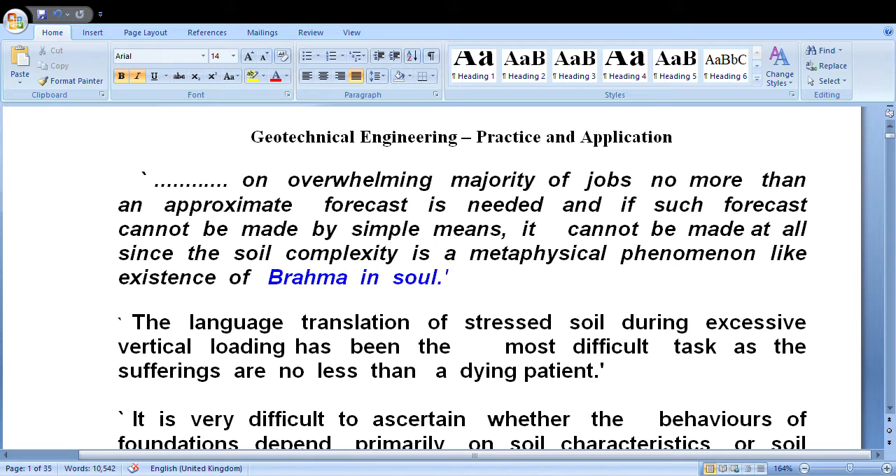Another comment was made by Scott and Bowles. It is very difficult to ascertain whether the behavior of a foundation depends primarily on soil characteristics or soil behaves at the will of foundations, like a seed plant phenomenon. Yet the behavior of underlying soil has a substantial role in construction management.

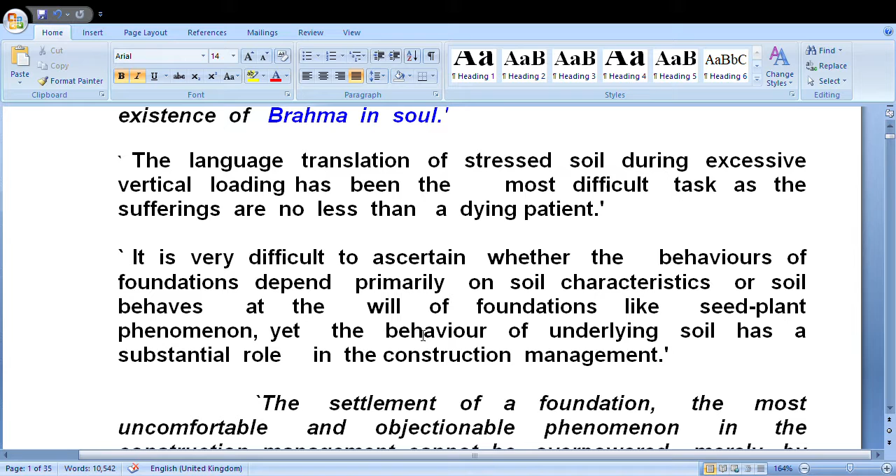Scott made specific comments on settlement. The settlement of a foundation, the most uncomfortable and objectionable phenomenon in construction management, cannot be overpowered merely by theoretical estimate alone, as the mineral skeleton breakdown may not always be proportional to time elapsed.

Another great comment was made by Karl Terzaghi, the father of soil mechanics. Soil mechanics is neither a theoretical science nor a mathematical science, as it is a practical science based on intuition only.

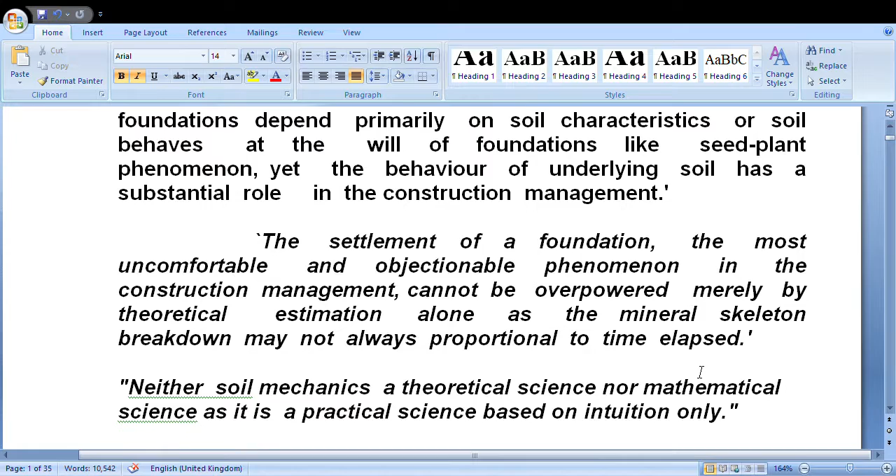Another specific comment is from my reverend guru, Dr. A.N. Chaudhary, who was a student of Professor Winterkorn at Princeton University. In his project report, he said: till now we are ignorant or incapable of actual estimation of the soil foundation interaction system. For this reason of lack of compatible knowledge, we more commonly prefer to adopt a fool-factor in the name of safety, even with no hesitation in putting a huge quantum of concrete underground, while misleading information and immature interpretation of principles are the root of all major structural damages.

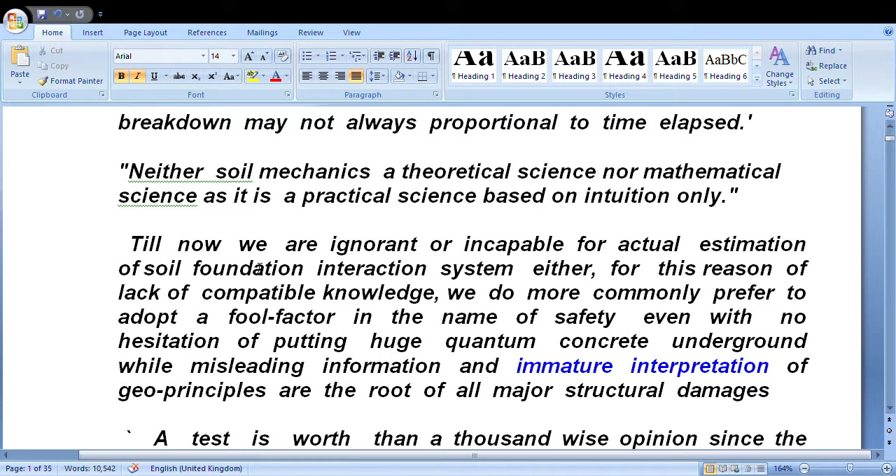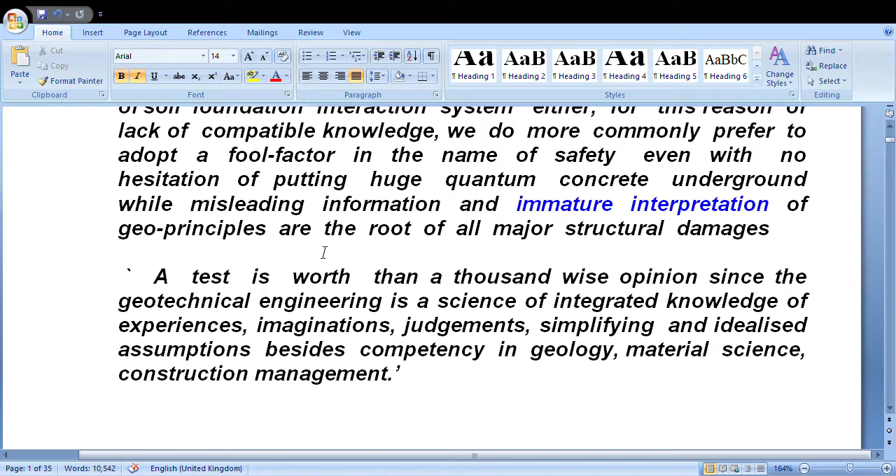Dr. Karl Terzaghi once also commented, a test is worth a thousand wise opinions, since geotechnical engineering is a science of integrated knowledge of experience, imagination, judgment, simplifying and idealized assumptions, besides competency in geology, material science, and construction management. In fact, I have presented these comments here to you so that you can understand what geotechnical engineering is.

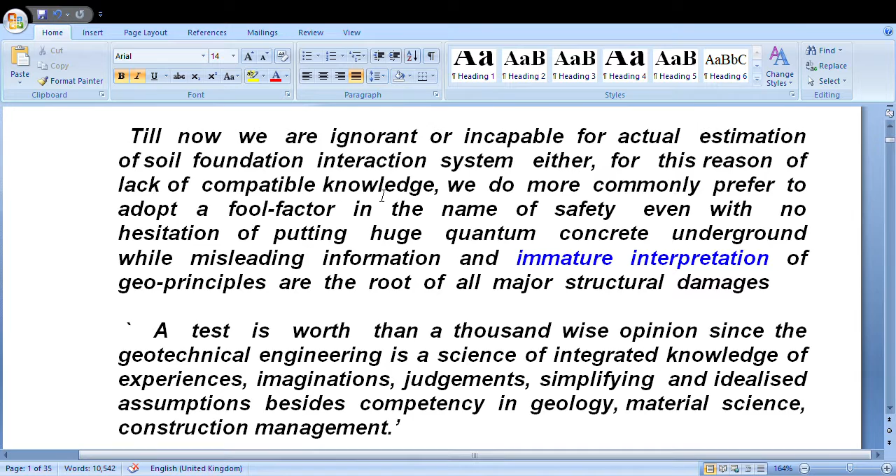In earlier days, geotechnical engineering was known as soil mechanics and foundation engineering, the science of engineering soil and its behavior in foundations. Although the youngest science, it is neither a mathematical science nor a theoretical science; it is a science of reasoning and intuitional judgment. So soil mechanics is the art of civil engineering. Every structure except flying or floating rests on soil. The relation between soil and foundation is Geotechnique.

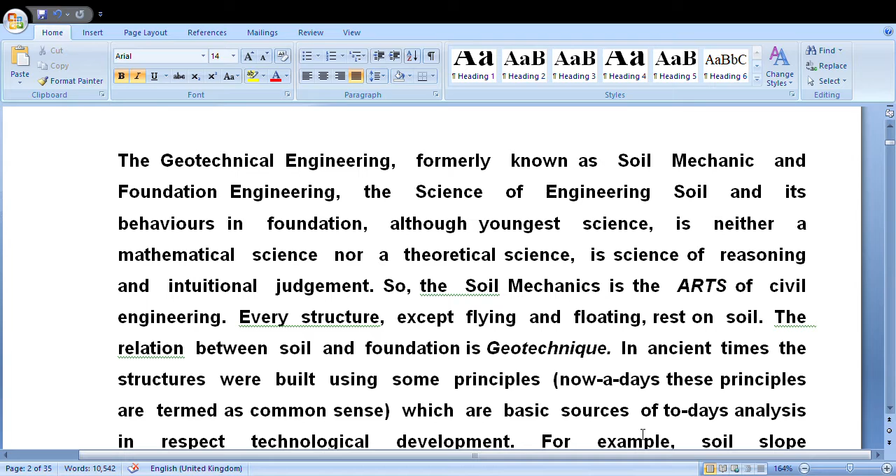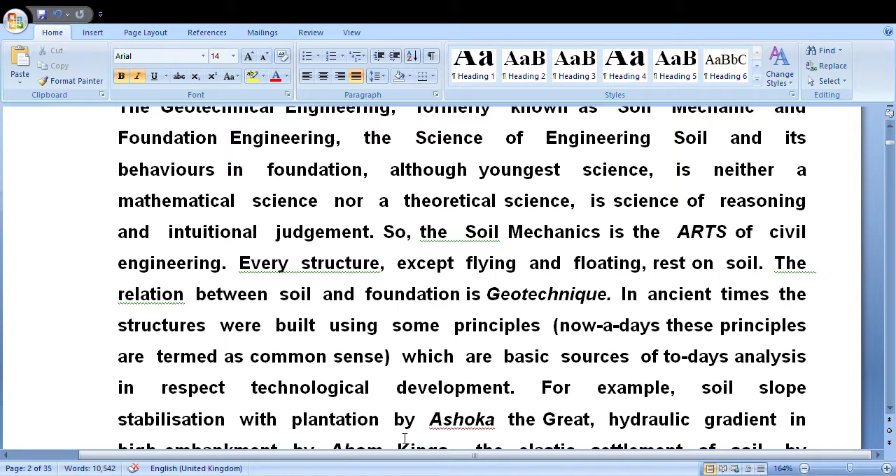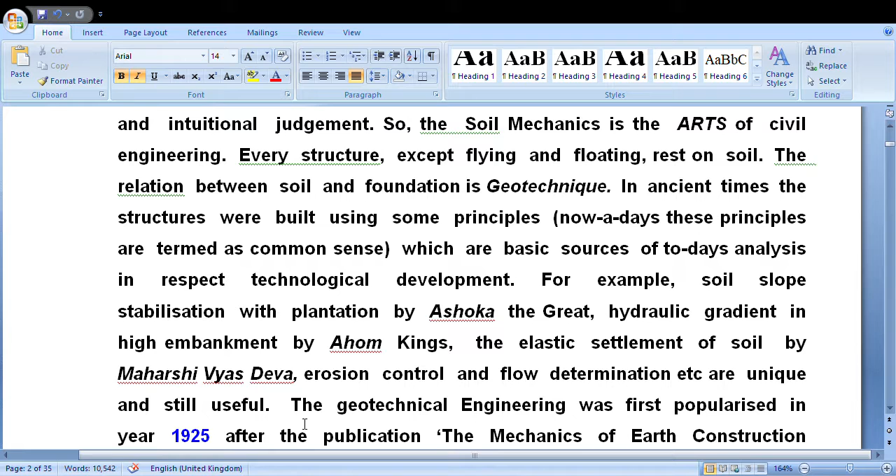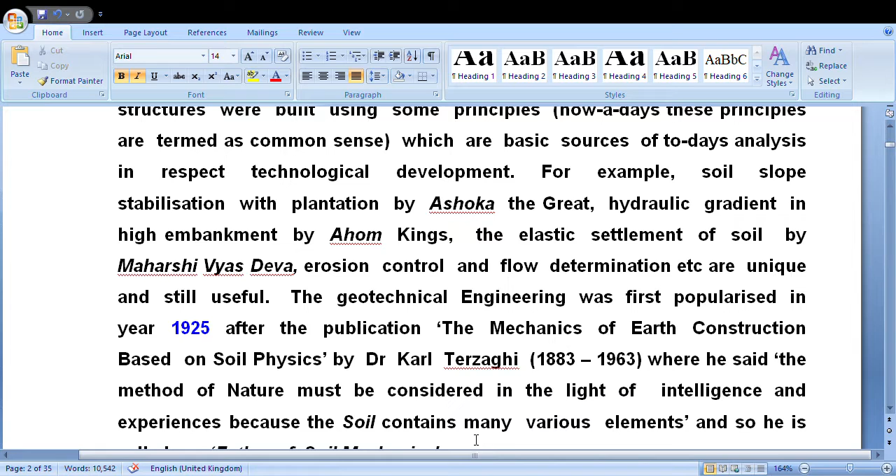Geotechnical engineering was first published and popularized in 1925 after publication of the Mechanics of Earth Construction based on soil physics by Dr. Karl von Terzaghi, where he said the method of nature must be considered in the light of intelligence and experience, because soil contains many various elements, and so he is called the father of soil mechanics.

Geotechnical engineering covers the science of soil mechanics, soil engineering, rock mechanics, engineering geology, foundation engineering, hydrology, everything. It is an essential and integrated part of civil engineering. Modern geotechnical engineering even covers geo-environmental engineering, geoecology and geolandscaping too.

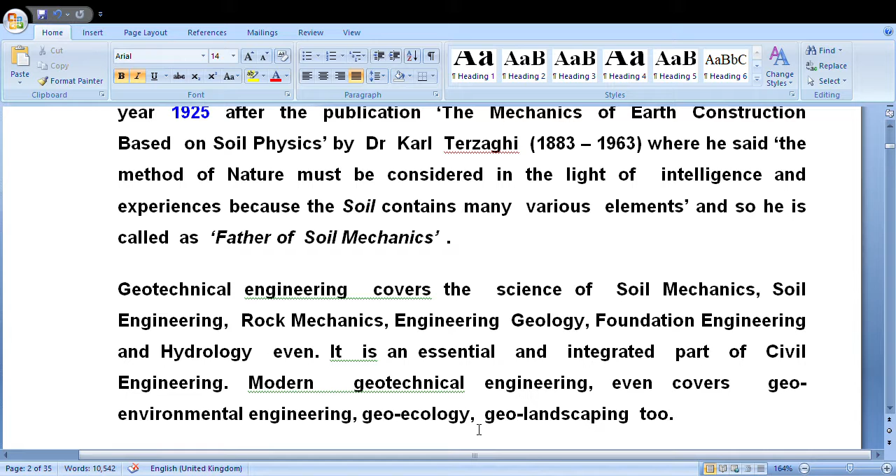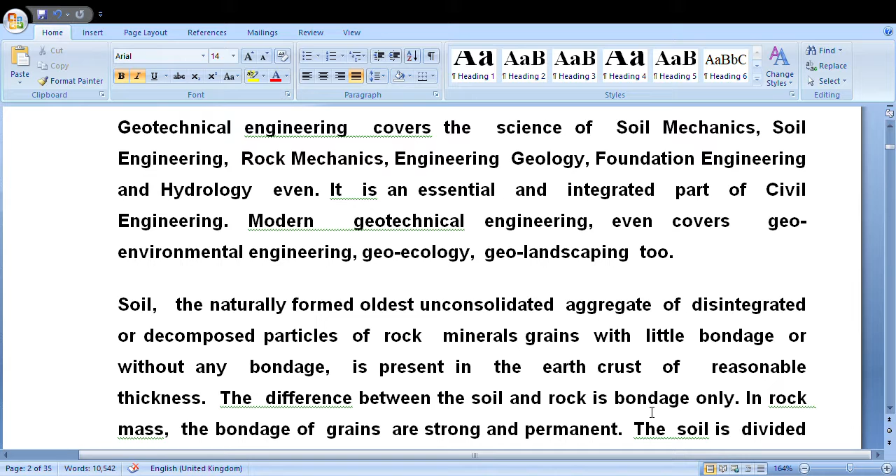Soil is naturally formed of unconsolidated aggregates of disintegrated or decomposed particles of rock mineral grains, with little bondage or without any bondage, and available at the earth's crust for reasonable thickness. The difference between soil and rock is bondage only. All the mineral constituents remain the same. In rock mass, the bondage of grains is strong and permanent. Soil has no bondage of grains at all, or very poor.

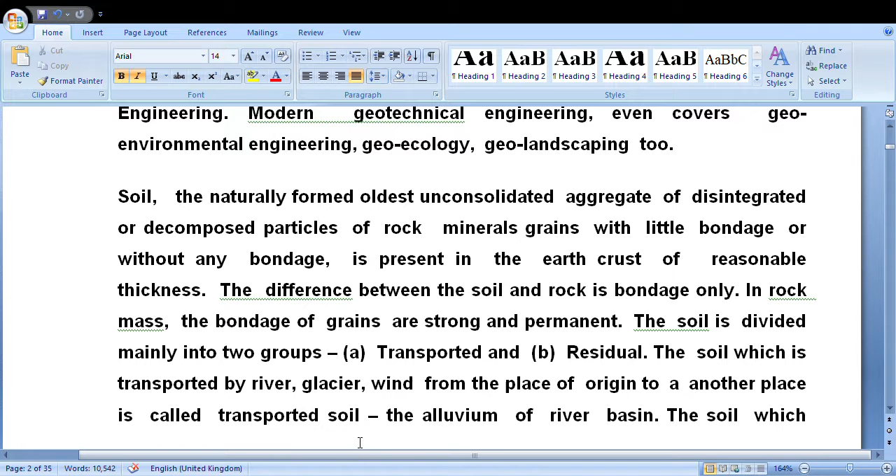Soils are divided mainly into two groups, residual and transported. Soil which is transported by river, glacier, or wind from the place of origin to another place is called transported, like alluvium of a river basin. Soil which remains at the same place of origin is residual. Hill soil other than structural hills.

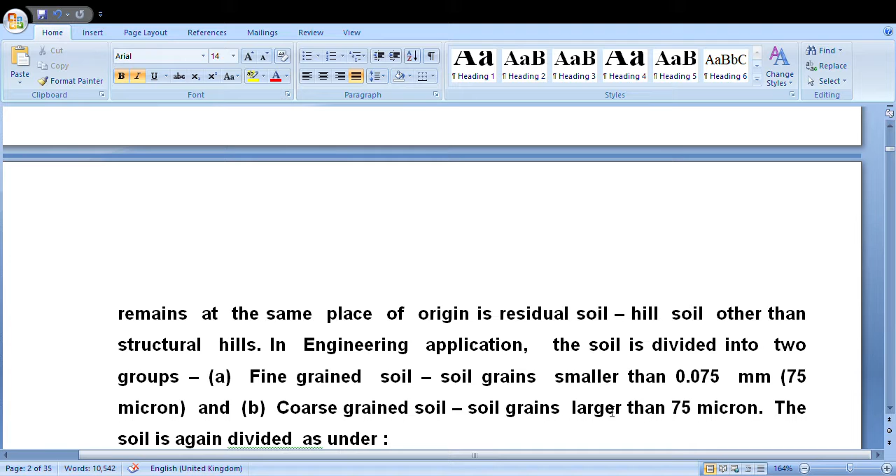In engineering application, soil is divided into two groups, fine grained soil and coarse grained soil. Fine grained soils are finer than 75 micron, and coarse grained soils are above 75 micron. Here, less than 2 micron is the clay fraction, 2 to 75 micron is silt, and from 4.75 mm it is gravel,

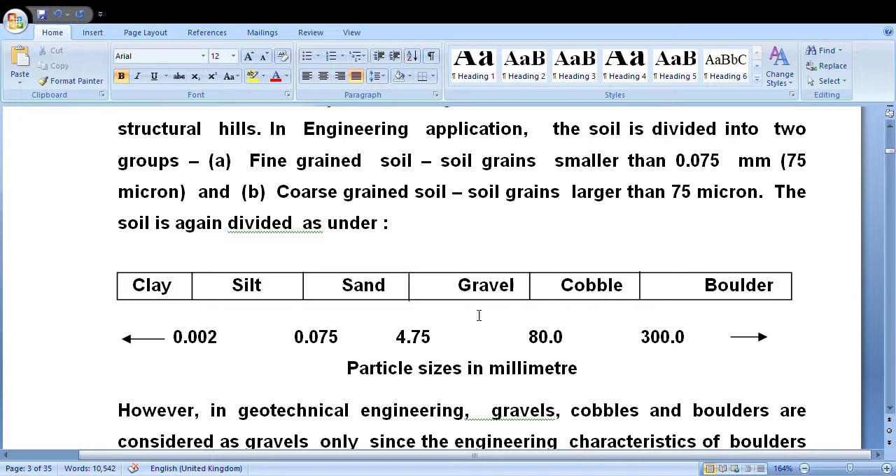up to 80 mm. Some say it is 70 mm, and some say 75 mm. However, up to 70 to 80 mm it is gravel, up to 300 mm it is cobble, and above 300 mm it is called boulder. But in geotechnical engineering, a particularly important factor is there. Gravel, cobbles, and boulders are all considered as gravel, because the engineering properties of cobbles and boulders are the same as those of gravel. So gravel, cobbles, and boulders are considered as gravel only.

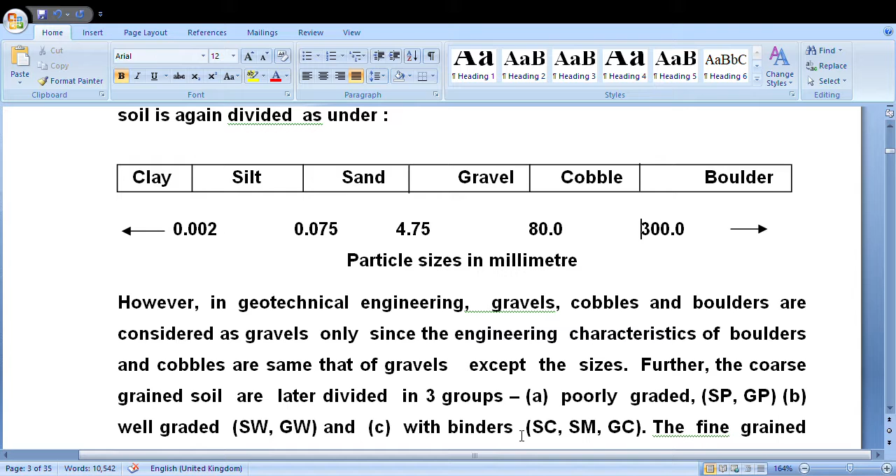Later, these types of soils, coarse grain and fine grain, whatever it may be, are considered in three groups: poorly graded, well graded, and with a little binder, that is fines. These are poorly graded SP GP, well graded SW GW, and with little binders, that is SC, SM, GC.

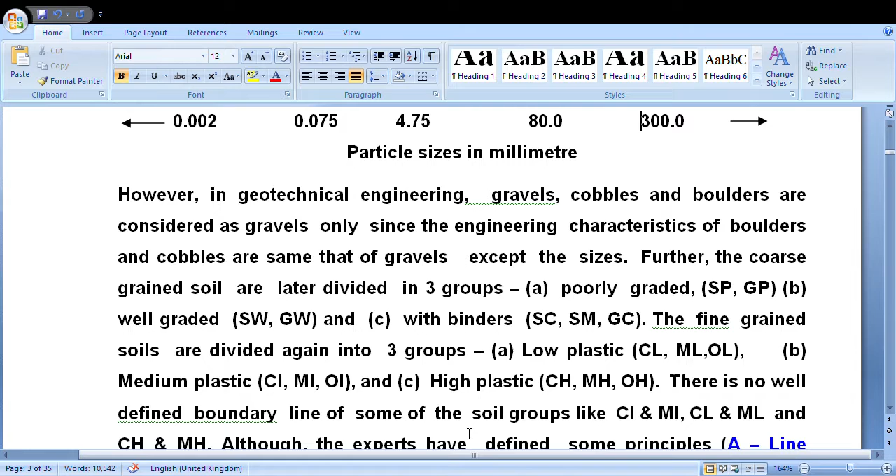In addition, fine grain soil is also classified into three different groups: low plastic such as CL, ML, OL; medium plastic CI, MI, OI; high plastic CH, MH, OH. There is no well-defined boundary line between some of these soils, like CI and MI, CL and ML, and CH and MH, although experts have suggested some principles, called the A-line curve, depending upon the plastic limit and liquid limit.

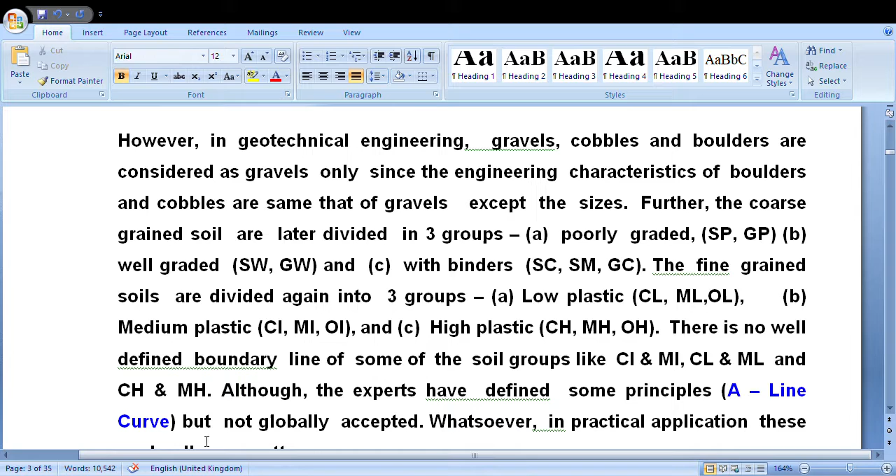But these A-line principles are not globally accepted. In practical applications, there is hardly any difference.

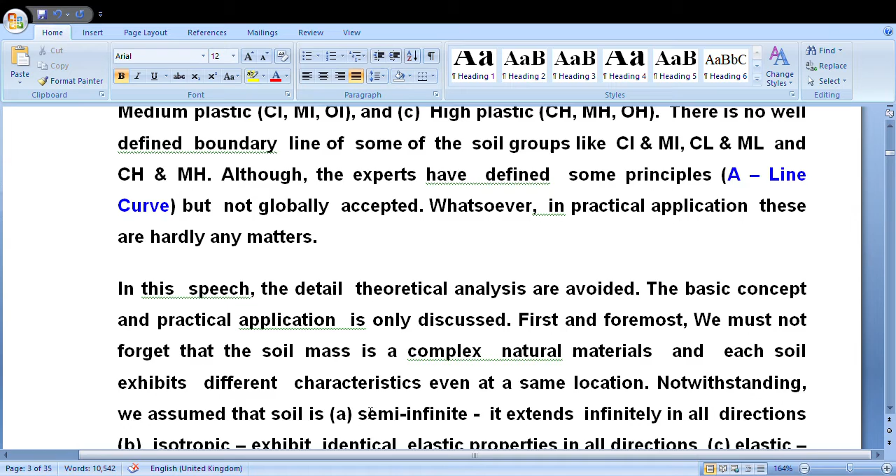In this speech, I am trying to avoid more details about theoretical analysis. Basic concept and practical application is discussed here, so that it will be primarily informative to young engineers, especially young practitioner engineers. We must not forget that soil mass is a complex natural material, and each soil exhibits different characteristics at the same location.

Notwithstanding, we assume that the soil is semi-infinite, soil is isotropic, soil is elastic, soil is homogeneous, soil is weightless, and it has no past history.

At the same time, I would like to mention one thing: soil has different meanings too. For an agriculturist, soil is the surface material which supports vegetation and plantation. For a construction engineer, soil is a construction material for construction of highways, roads, pavements, and these things. And coarse grain soil is used as a construction material for other purposes also, like concrete structures, runways, roadways, and all this.

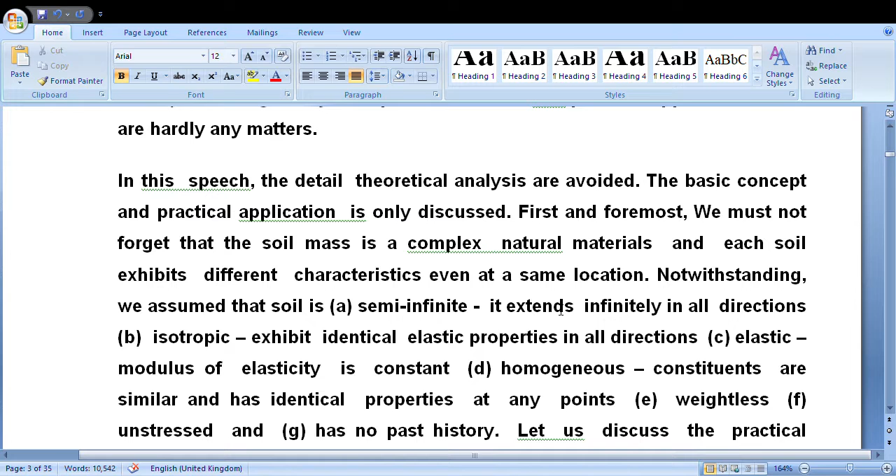For geotechnical engineers, soil is a complex substance of the earth's crust. Whether it is complex or not, for us we consider it complex since soil does not behave according to our own will, to our desires, to fulfill our desires. Soil never behaves as per our requirement.

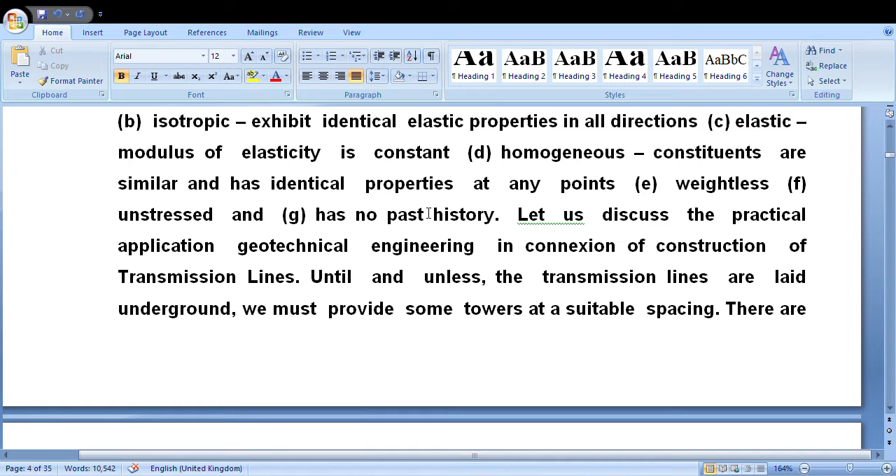Normally, we shall discuss the application of the soil parameters. It is since all types of structures rest on soil. That may be a shallow foundation on normal and standard average soil, or a deep foundation where shallow foundations could not be provided, such as at a riverbed, with very soft soil up to a reasonably high extent.

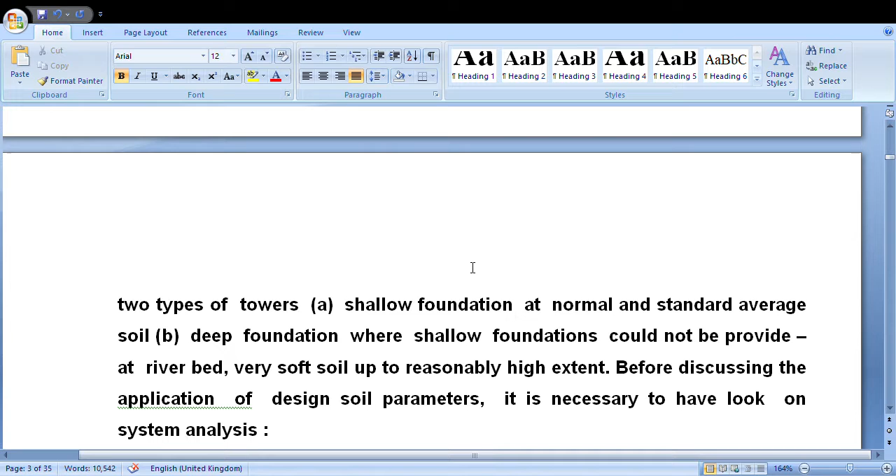So before discussing the main application, we must know how to derive our design parameters. For construction of a shallow foundation or deep foundation, I have already discussed the difference: when foundation depth by width, Df by B, is greater than 1, it is deep foundation. When it is equal to 1 or less than 1, it is shallow foundation.

For deep foundation or shallow foundation, we require SBC. In the case of piles, we require pile load capacity based on the same parameters. For that purpose, we require our SBC. Then, for the required parameters, we can estimate it from laboratory tests. For laboratory tests, we should go for field tests—these are boring and observation.

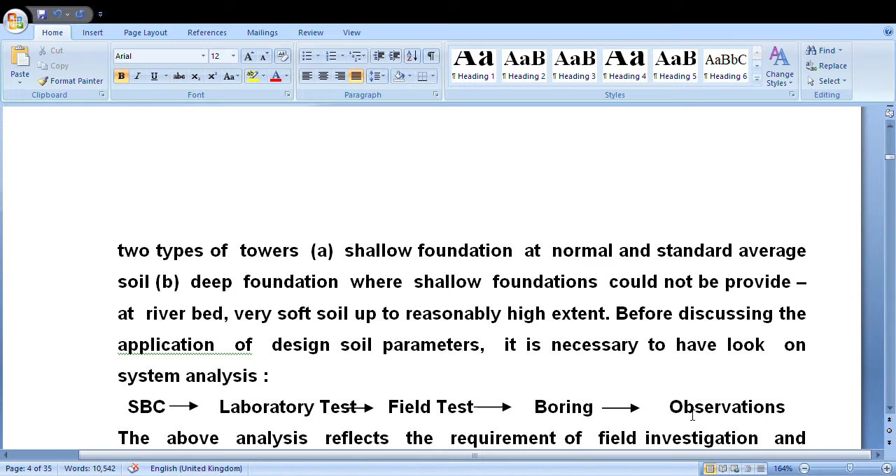The above analysis reflects the requirement of field investigation and observation, and laboratory test results, for designing the foundation base of any tower foundation, building foundation, or well foundation—whatever it may be, for any type of foundation.

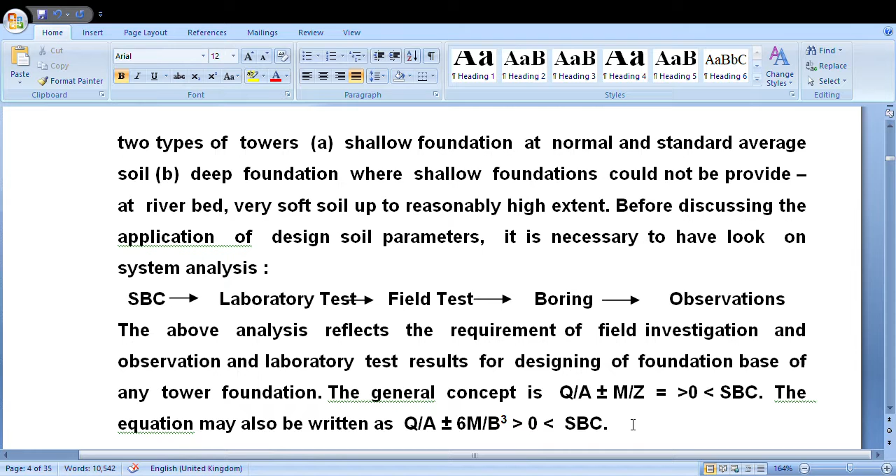SBC, the safe bearing capacity, is the maximum load bearing capacity with a suitable safety factor, without any excessive settlement.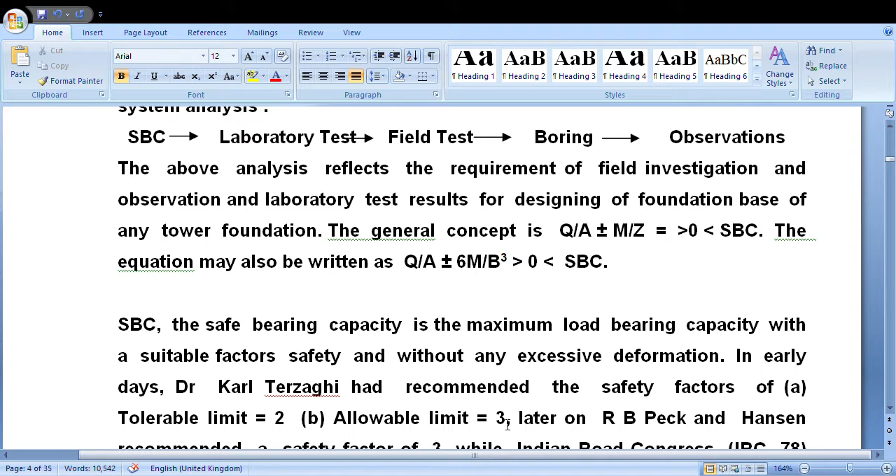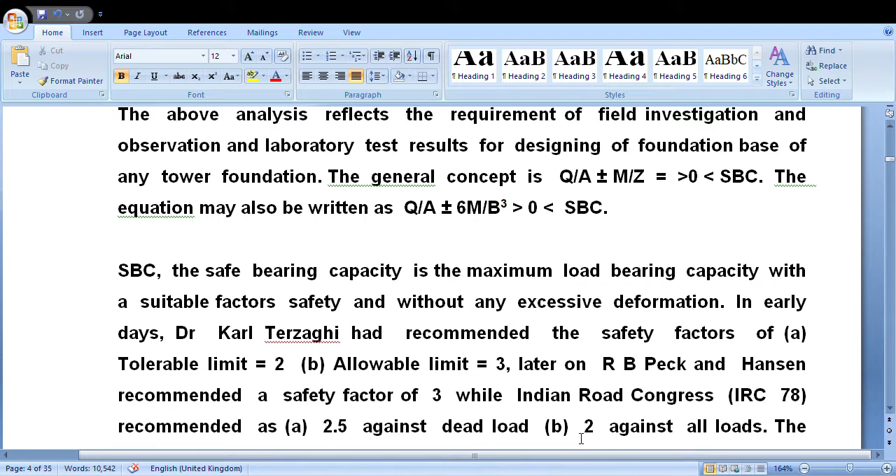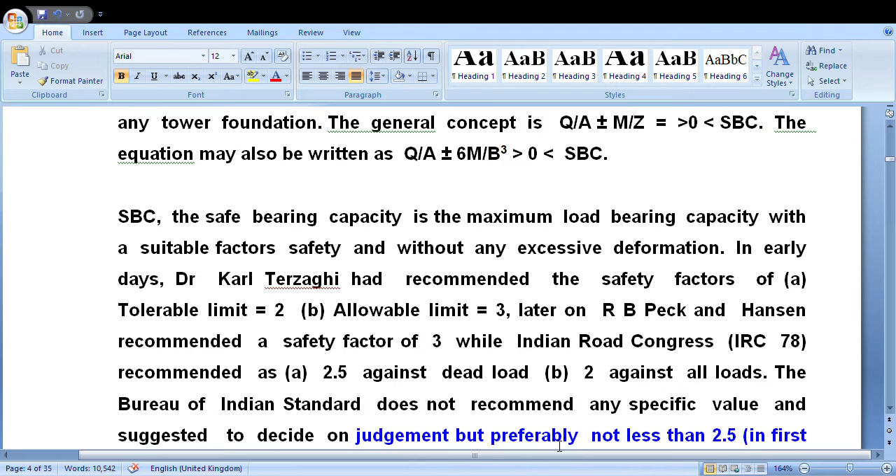In early days, Dr. Karl von Terzaghi had recommended a safety factor of tolerable limit as 2, allowable limit as 3. Later, Peck, Hansen, and Thornburn also recommended a safety factor of 3, while the Indian Road Congress recommended 2.5 against dead load and 2 against combination of all loads. The Bureau of Indian Standards does not recommend any specific value and suggests deciding on judgment, but preferably not less than 2.5, in its first publication in 1971, and the second publication in 1981 and 2000.

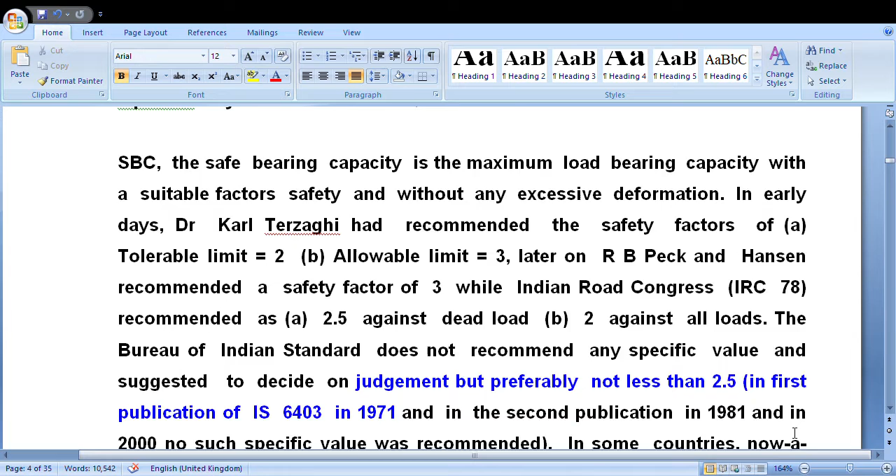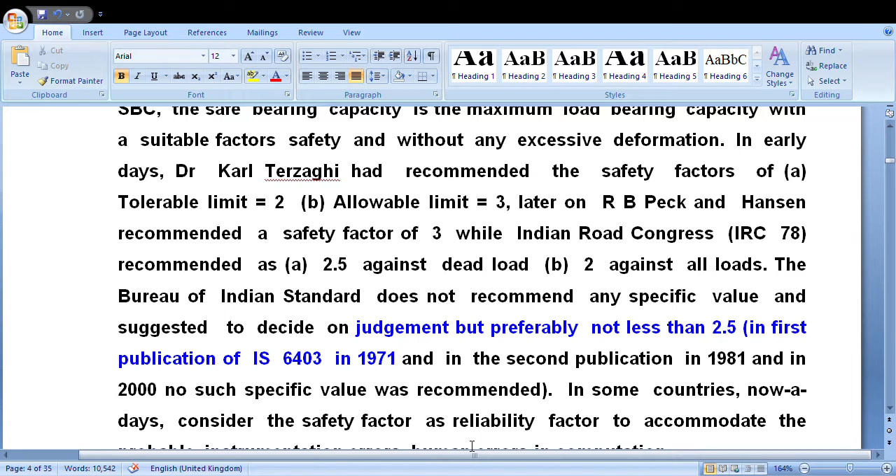No such specific value was recommended. In some countries nowadays, the safety factor is considered a reliability factor to accommodate probable instrumentation errors and human error in computation. In earlier days, in the 1960s, it was called the Fool's Factor, not safety factor. That means if there are big mistakes in collection of samples, in laboratory tests, and immature computation, then the safety factor should be taken as more. And if chances of mistakes are very less or negligible, then the safety factor may be 2.

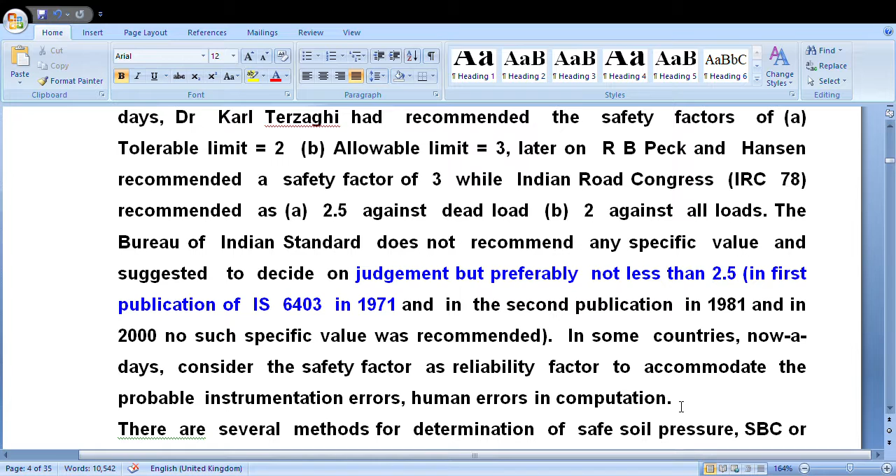There are several methods of determination of SBC, that is QA.

Out of these methods, the more popular ones are the QU and C-phi method, plate load test, SPT values, and stress-strain relationship.

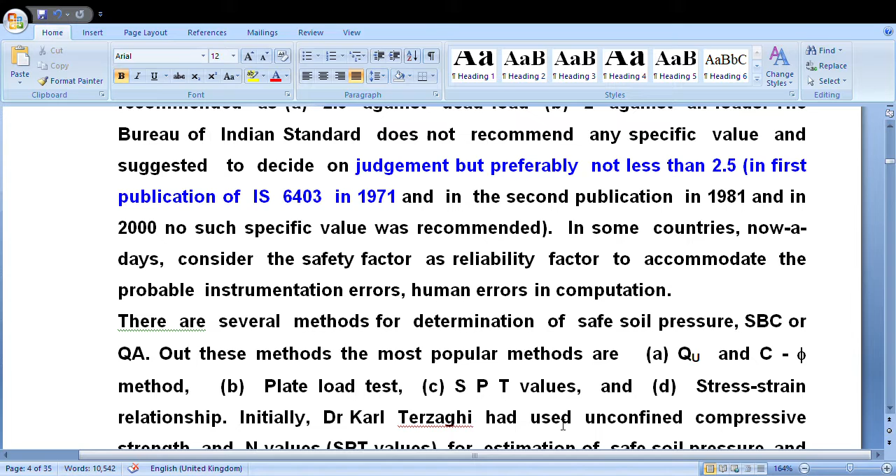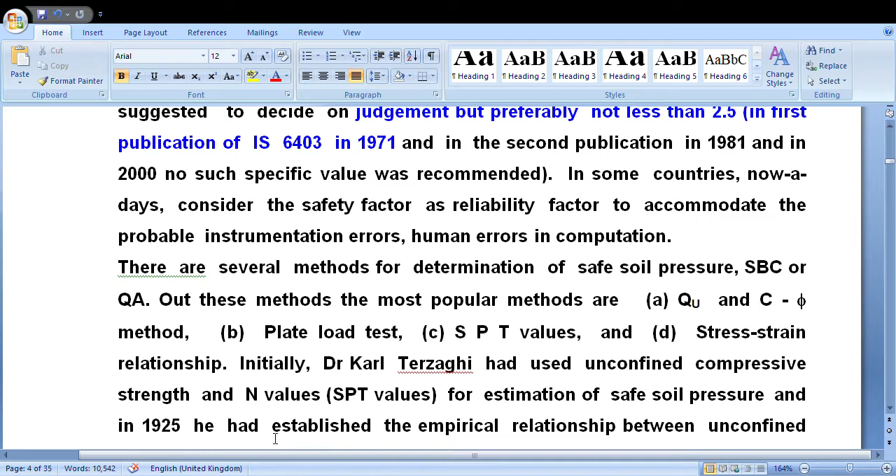Initially, Dr. Karl Terzaghi used unconfined compressive strength and N values for estimation of safe soil pressure, and in 1925 he established the empirical relationship between unconfined compression and confined shear test.

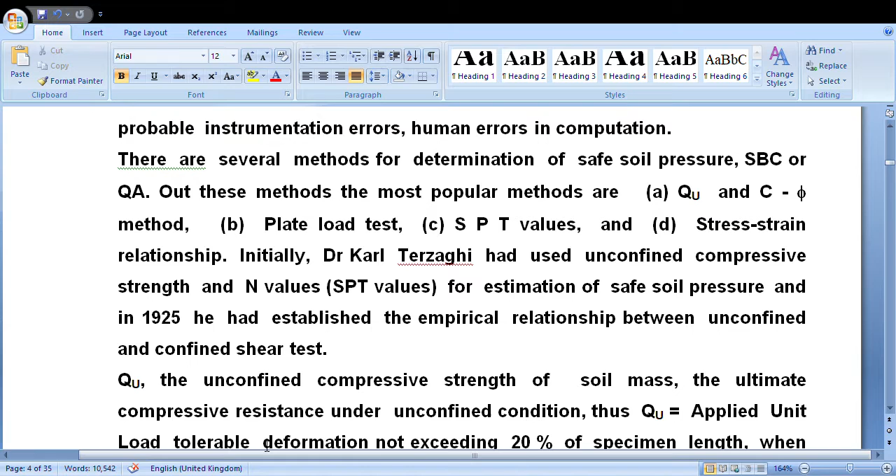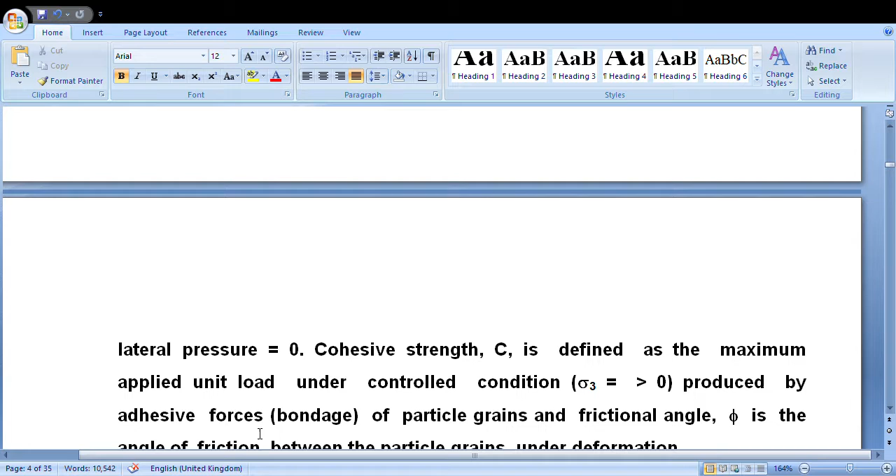The unconfined compressive strength of soil mass is the ultimate compressive resistance under unconfined condition. Q equals applied unit load at tolerable deformation not exceeding 20% of specimen length, when lateral pressure is zero, and cohesion C is defined as the maximum applied unit load under this condition, sigma 3 equal to 0, produced by adhesive force of particles and grains. Frictional angle is the angle of friction between the particles and grains under deformation.

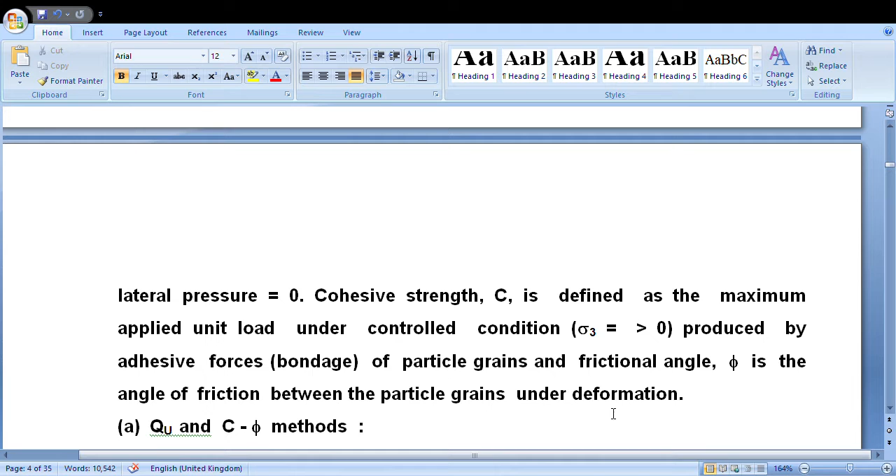From these relationships there are two methods: the QU and C-phi method. In the QU method, C is a constant times QU divided by the safety factor, with the constant varying from 2.85 to 3.57. Terzaghi recommended 3.57 for square and circular foundations and 2.85 for continuous foundations.

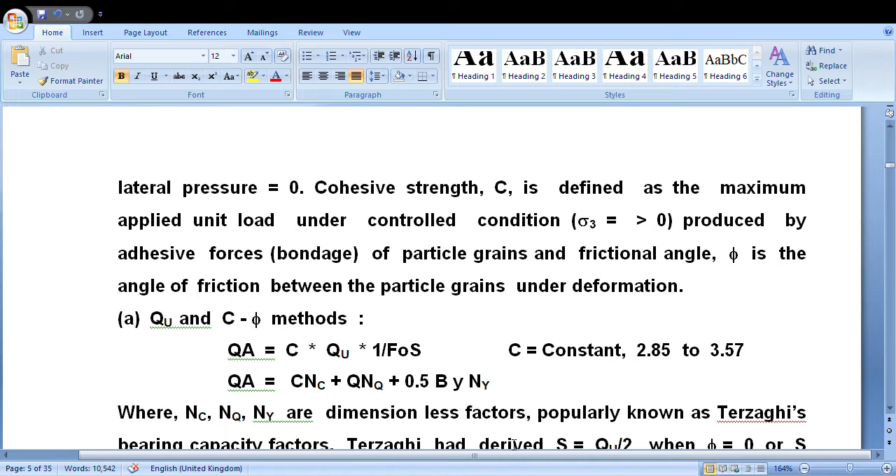And in the C-phi method we use C and Q, and half B gamma, with factors NC, NQ, and N-gamma. These are popularly termed the dimensionless Terzaghi bearing capacity factors.

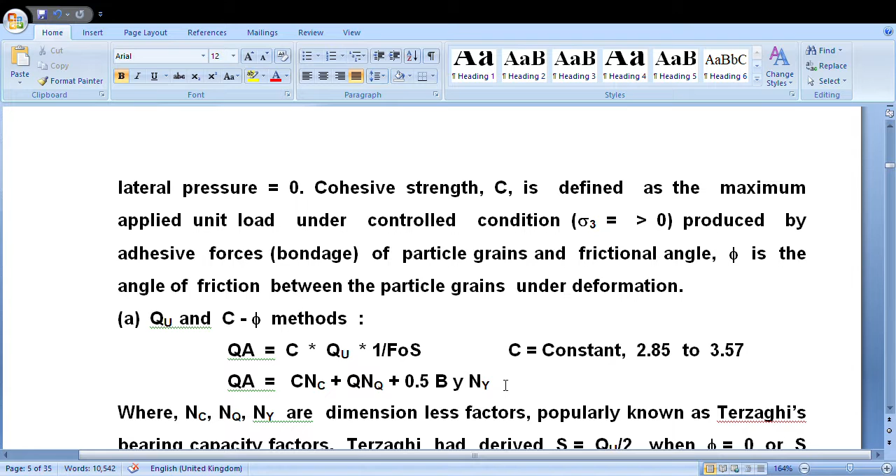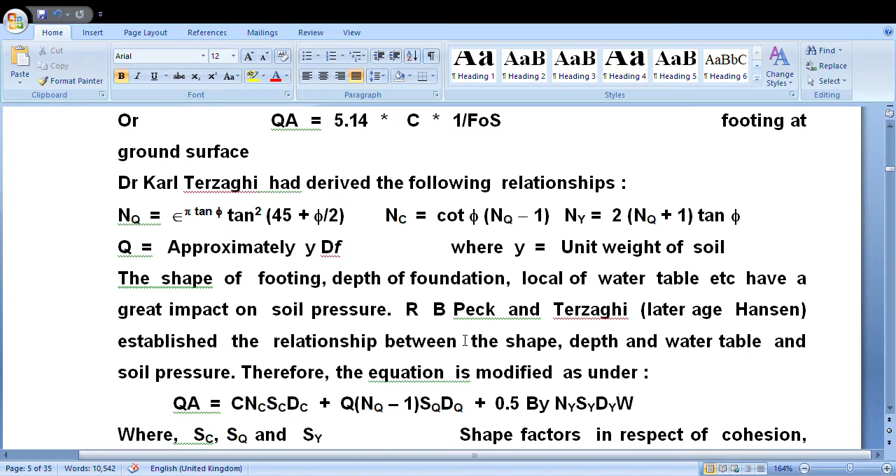After a few years, Terzaghi found that these equations were based on ground level only, not much below. So Terzaghi, Peck, and Hansen included some other factors, shape factor and depth factor, in the original bearing capacity equation.

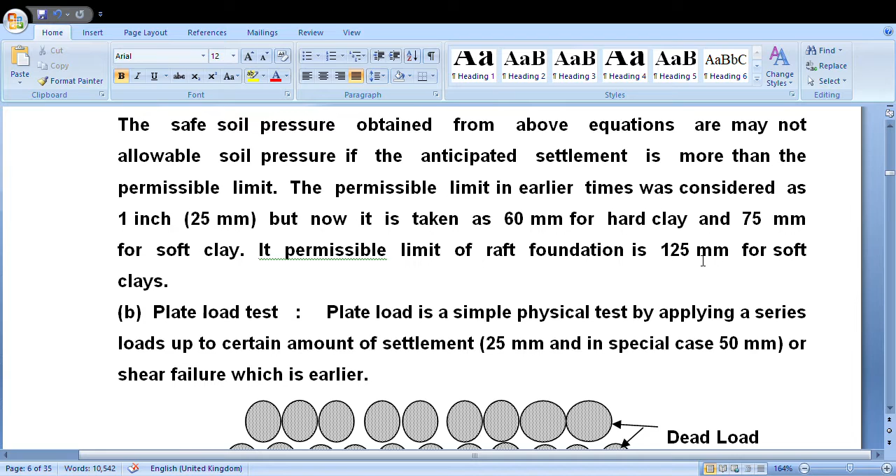Another method is the plate load test. Nowadays it is considered a physical verification of the theoretical estimate, but earlier it was conducted for finding design parameters, and more importance was given to the plate load test than to theoretical calculation or laboratory test results. So the plate load test is conducted directly. This is the arrangement of the plate load test.

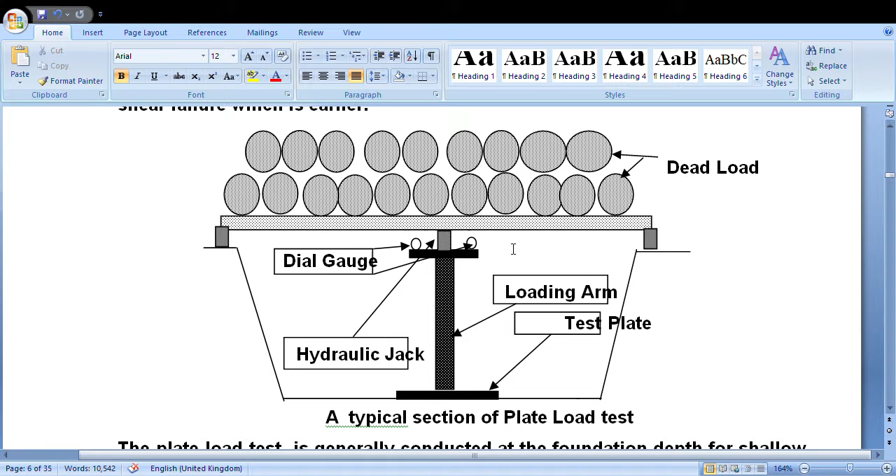This is the loading plate, and there will be some dead loads, and settlement shall be measured using sensitive dials, minimum 2, or you can put 4 also. In case of 4, there shall be a two-stage computation: one diagonally, another in the other direction, then taking the average of both directions to calculate the settlement.

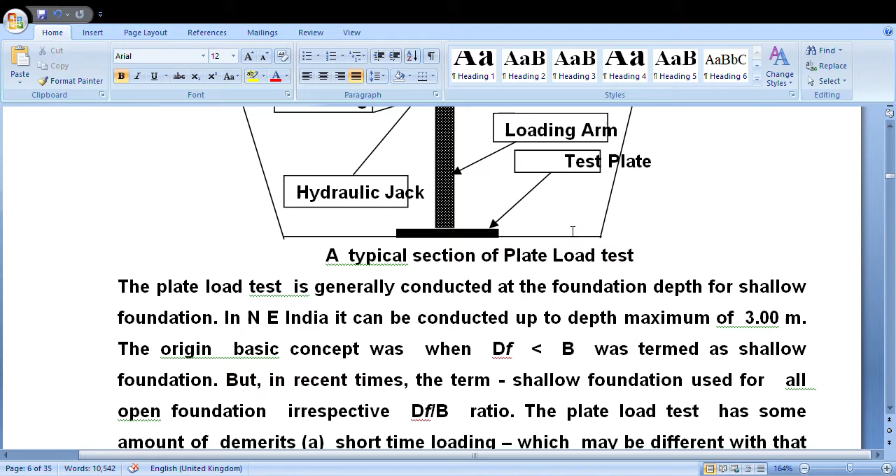This settlement measurement is good for shallow foundations when Df is less than B. There are some drawbacks too: it is a very short time loading, and the plate size is small, maybe 600 by 600 or 750 by 750, in some cases 1.2 or 1.25 meter, but our foundation size is much bigger than that.

There are a lot of empirical equations to convert the settlement of the small test plate to actual foundation size, given in IS codes such as IS 8009 Part 1. There is an equation like B plus 30 over BP plus 30. There are some other equations too, with very nominal difference between them.

But in normally consolidated clay, mostly everyone suggests that settlement is directly proportional to width. If we use a 60 size plate and our foundation dimension is 6 meters, that's 10 times more, but actually the settlement is not 10 times more.

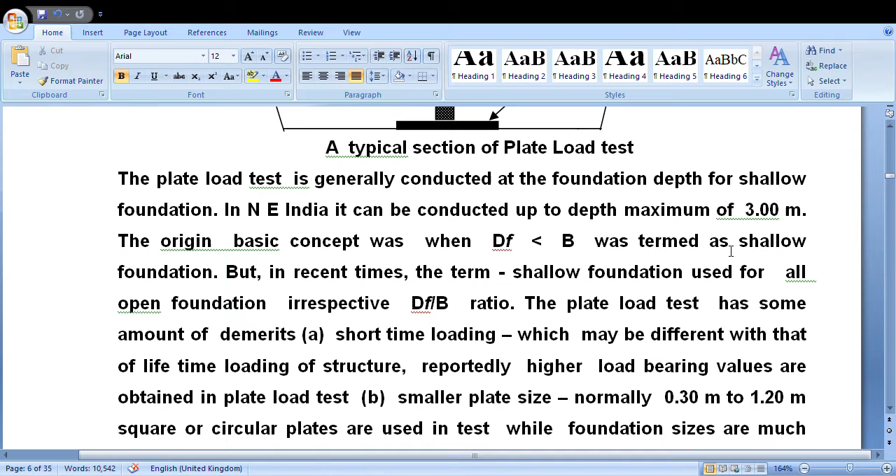In normal cases, Bowles' equation is most reliable: it is B by Bp to the power n, where n varies from 0.3 to 0.7, whereas some say that n value should be 1 or more. Whatever it may be, I have discussed that portion in my later discussion.

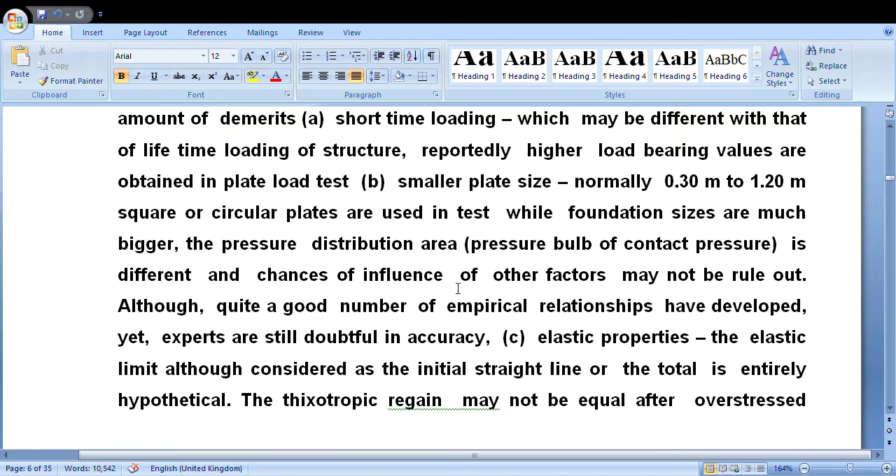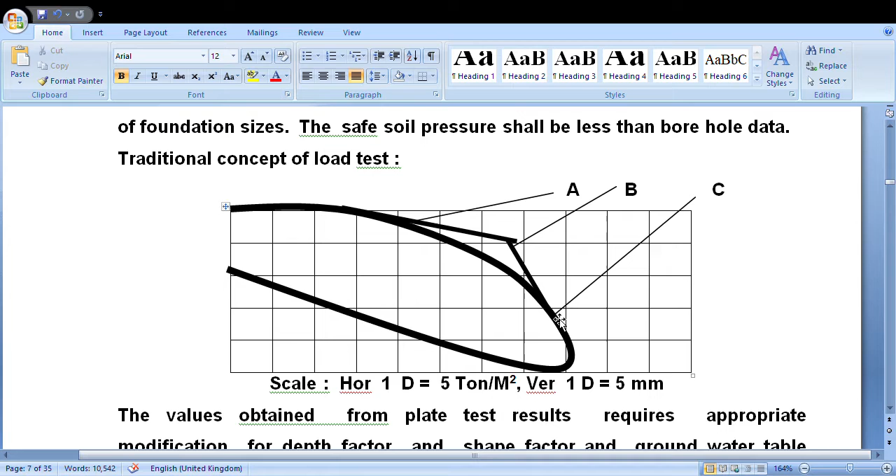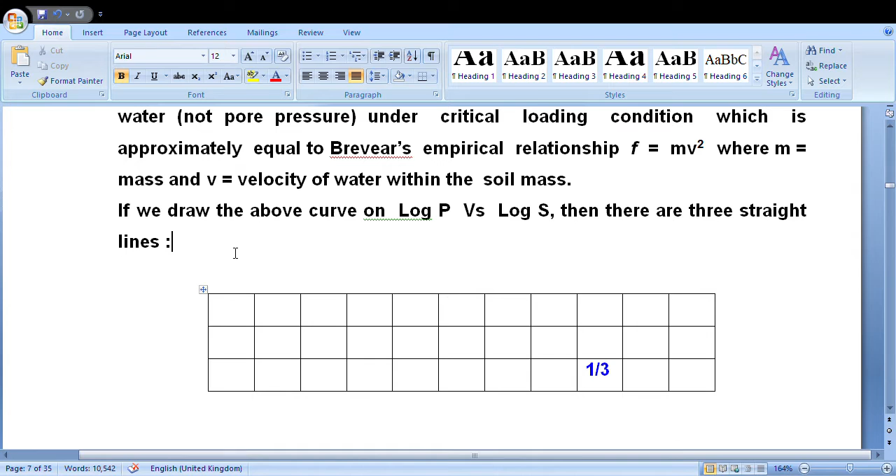This is another one, recommended by Bowles and Scott. This is the elastic limit, in a plot of load versus settlement. This is the settlement axis, this is the load axis. This is the elastic limit, this is the tolerable limit, and this is the failure limit. If we plot this line in log scale, on both sides as logs, I shall make it clear to you.

You see this portion going straight upward. Here it is a gentle upward slope. Here it is a straight line.

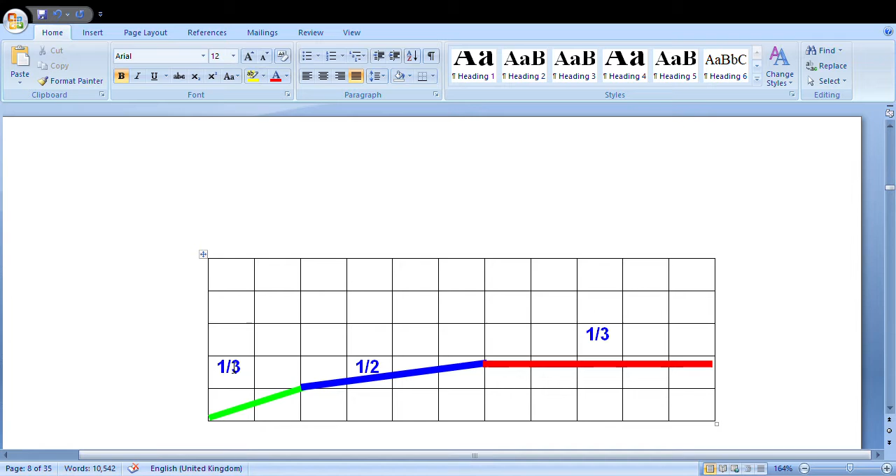This is the elastic limit, this is the plastic limit, and this point C is shear failure. Here there is a shear failure, so no further load can be taken.

The same load will be continued. If we are putting more excessive load, ultimately the pressure gauge will be coming here on log scale. This is a straight line with an upward tendency, and this portion has an upward tendency, but it is very gentle.

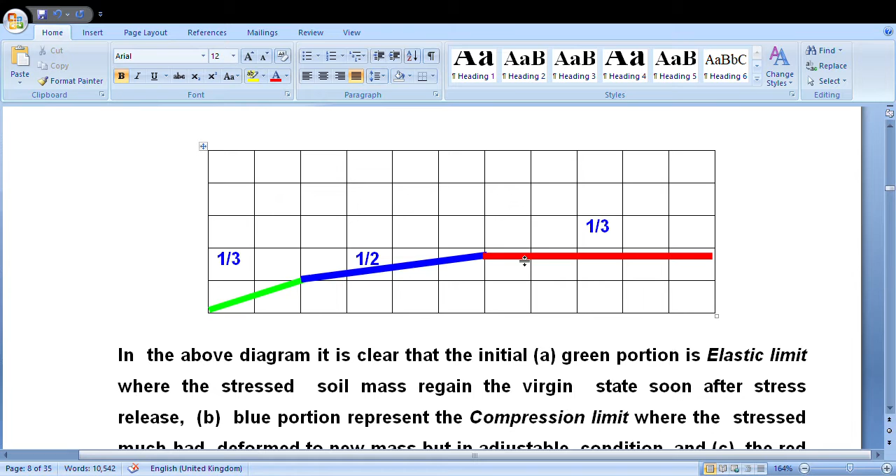Very gentle. Here it is 2 divisions, here it is 4 divisions. For crossing 2 divisions vertically, horizontally will require 4 divisions. So this portion is the plastic limit, and this portion is the elastic limit. This portion is the shear failure limit, shear failure zone.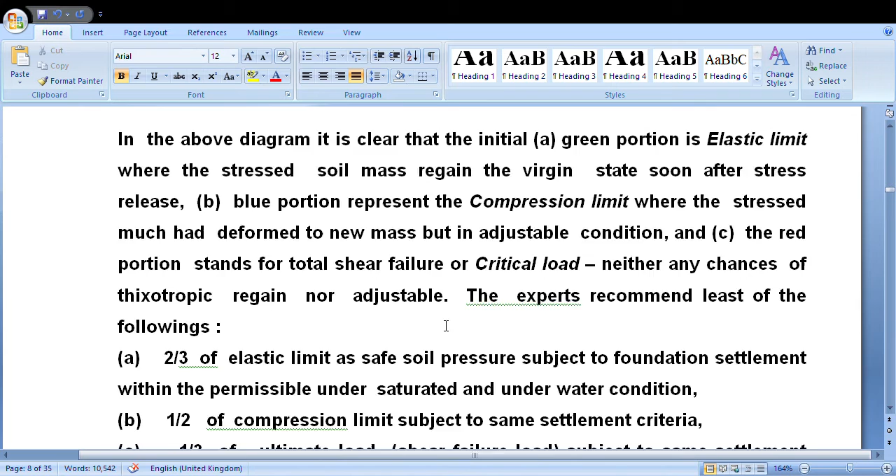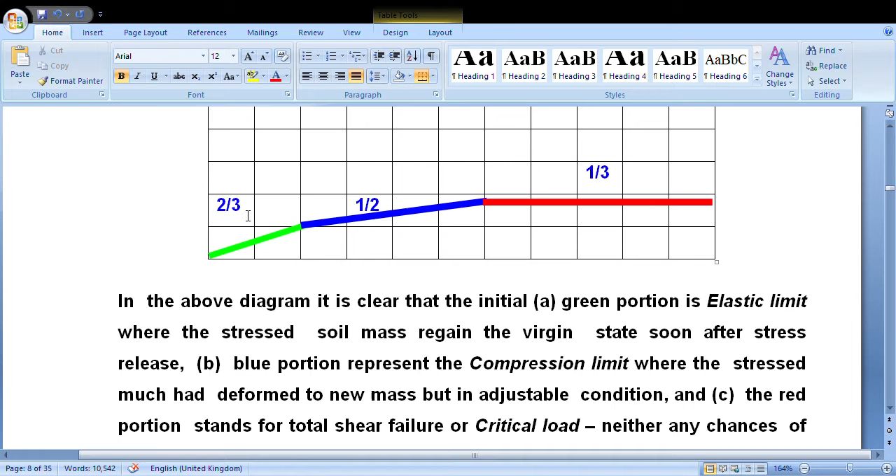So accordingly, they have suggested against this elastic limit, it should be 2/3. Here it is half, and here it is in the shear zone, it is 1/3. If we write it, instead of 1, if we write it 2/3, this is the safety factor: 2/3, half, and 1/3.

In the elastic limit, in the elastic portion, if we consider it is the ultimate elastic limit, then 2/3 is sufficient, since the elastic settlement is a settlement that will take a rebound state, there is a possibility of a rebound state. Even in a seismic condition, if it is due to earthquake vibration, if one side is releasing some load, that means if M by Z becomes negative on one side, that is lower side or higher side, in all cases the settlement will remain the same, since the soil also follows the load behavior, since it is within the elastic limit. It is the compression limit, that is the plastic limit.

Plastic limit, a safety factor of half is good enough. But here, 3 is required. 3 is essential.

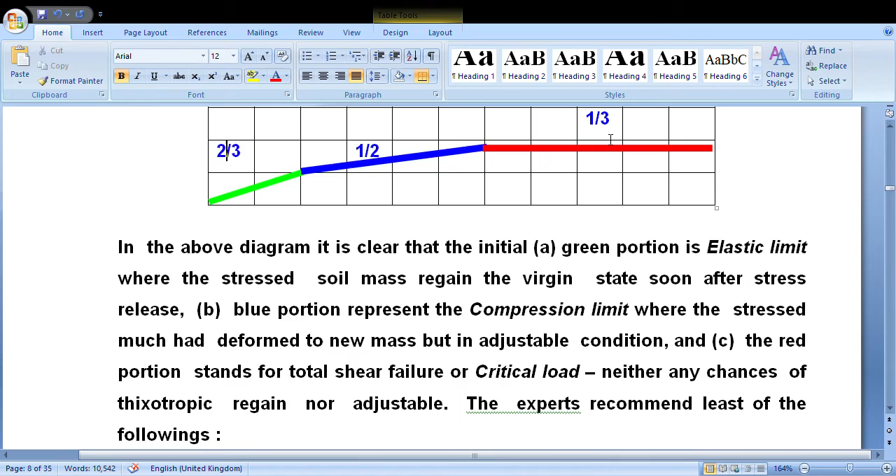Now you see the SPT value. This is the oldest method of determining soil pressure. SPT, the standard penetration test, by dynamic loading with a 65 kg drop hammer and a free fall of 75 centimeters, for 30 centimeter penetration of a standard split spoon sampler.

This sampler was earlier known as the Terzaghi sampler. Now it is called the standard split spoon sampler. So however, this is the first basis of determining SPT.

In earlier days, before the popularization of soil mechanics and foundation engineering, a known weight of a rod was allowed to free fall to penetrate inside the ground, and they would measure and calculate how much it would take for 1 inch penetration, what should be the actual limit.

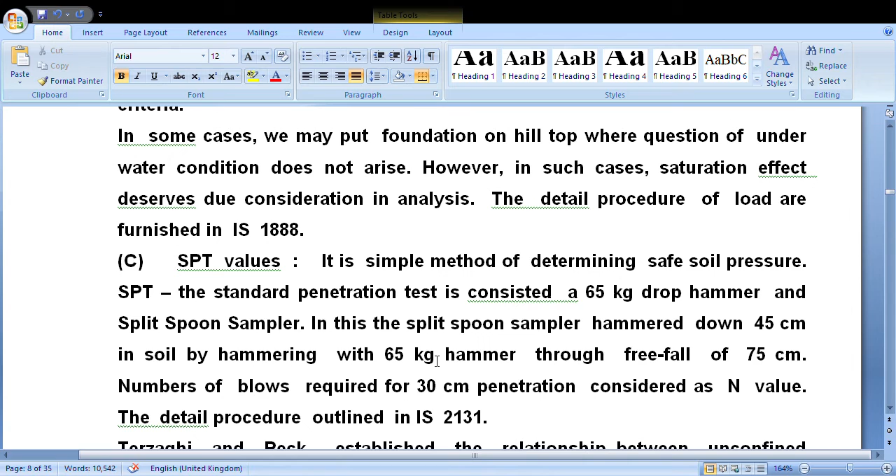Now our Indian Standard 2131 has also adopted this SPT method, and IS 8009 Part 1 also adopted the SPT method for determination of settlement, assuming settlement has a direct relationship with Sbc. So from settlement, Sbc can be recalculated.

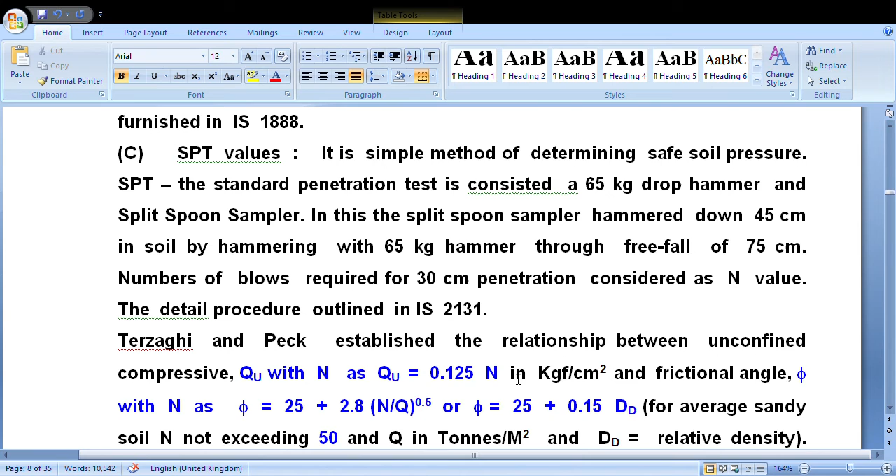There is some empirical relationship also. I am giving it here. These are all empirical relationships.

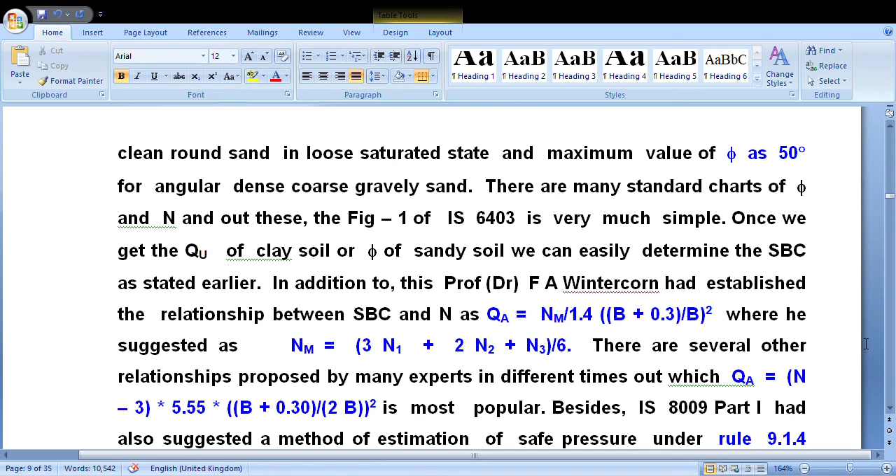Professor Wintercorn had established this relationship with a correction of B in the foundation width. This is another equation also.

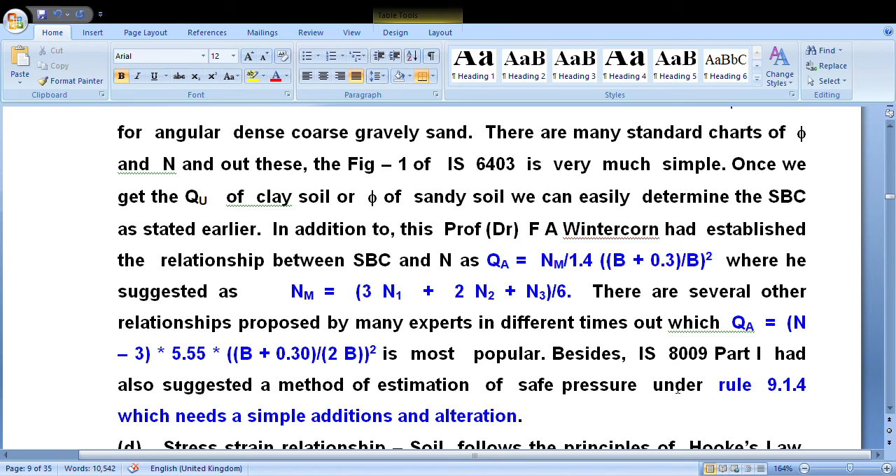The stress-strain relationship is the latest development of Hooke's law. Hooke's law defines that stress is proportional to strain. This is the elasticity of a material.

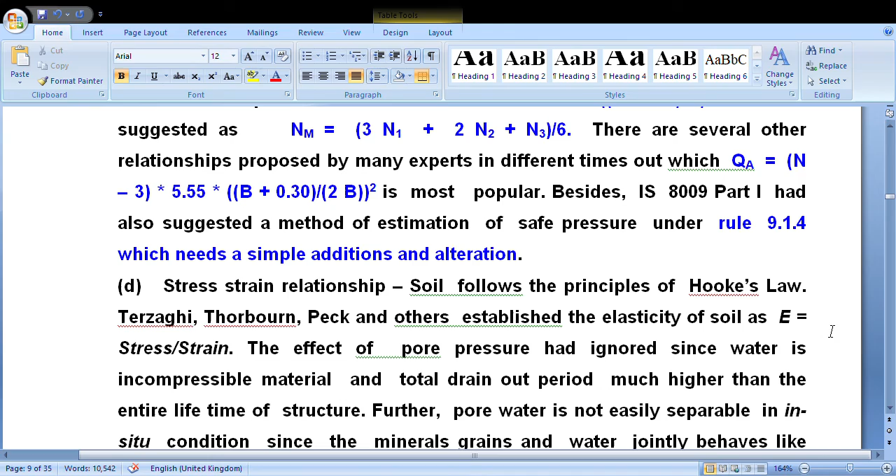So with the stress-strain relationship, we can calculate Sbc from the relationship of settlement. Settlement can be estimated with this, PBI, this is elastic, and 1 minus mu square. We can calculate from this, and here one thing is very important: it is applicable for hard clay. Other than hard clay, it is not applicable.

And this, you see, involves some amount of interpretation. In case of interpretation, one should be cautious. If we put B, S is either directly proportional to P and B, or both. If we increase both, or keep a constant P and increase B, our S will be directly increased. If for the same size we increase P, S will increase according to the increment.

So, since it is directly proportional, during computation we should be cautious. We should not exactly be overly conservative, but we should be very careful during application of this equation.